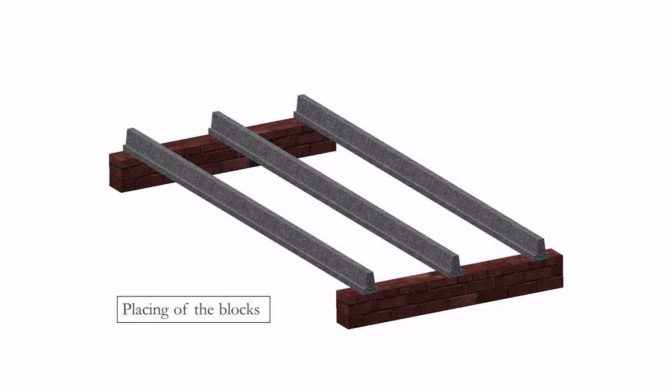The current solution for this problem is a beam and block floor. Steel reinforced concrete beams are put in place between the walls, after which smaller concrete blocks are positioned in between. On top of this created formwork, another concrete layer of about 5 cm is cast.

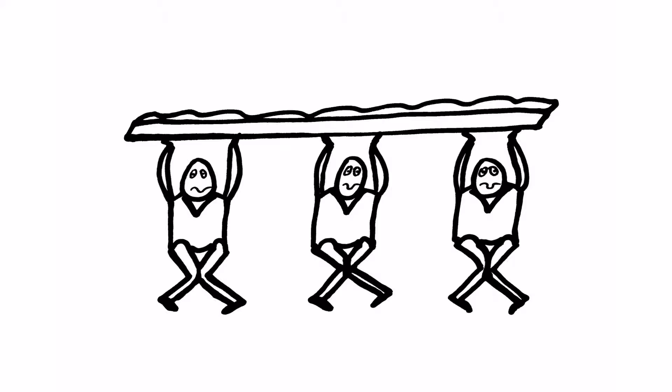This system is suited for renovation, because it consists of smaller elements, but still, these elements are heavy. Concrete beams with a typical span of 5 meters have a mass of approximately 100 kilograms. Such heavy elements have a low maneuverability and slow down the installation process.

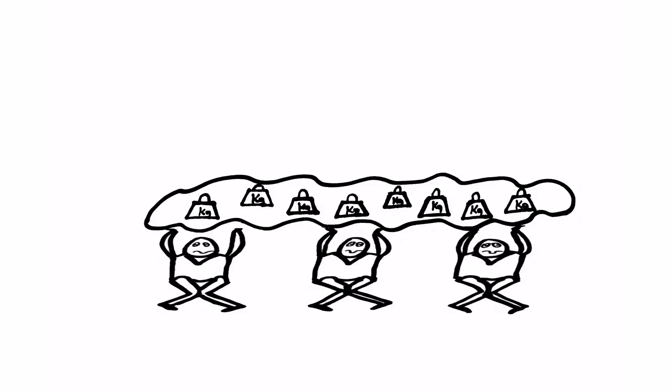At the Vrije Universiteit Brussel, we embraced this problem and turned it into a research question: is it possible to design a floor which is lightweight in installation, but still contains the required structural properties? Therefore, we elaborated the idea of combining concrete, carbon polymer composites, and cement composites.

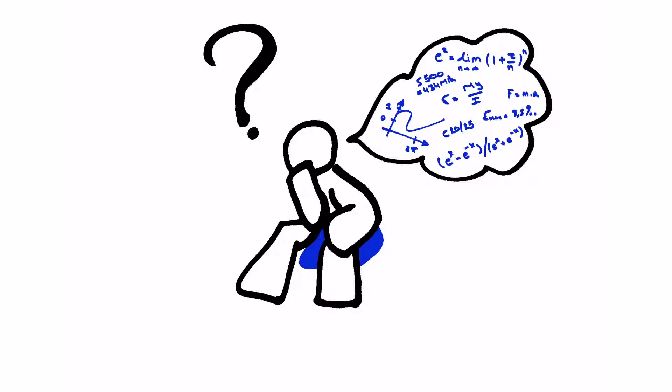To solve this question, I first made a theoretical approach to predict the floor's structural properties. All equations and formulas are integrated into MATLAB. Standard formulas are developed for traditional steel concrete cross-sections.

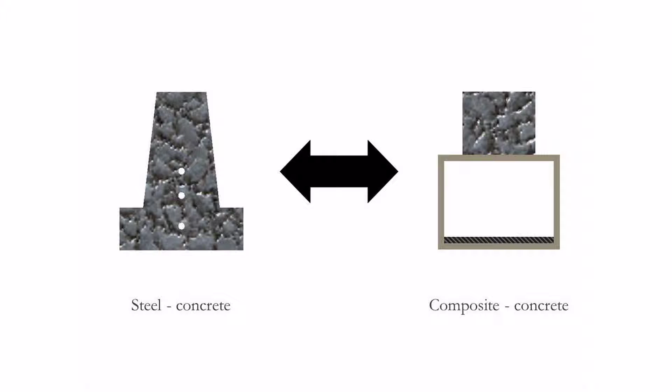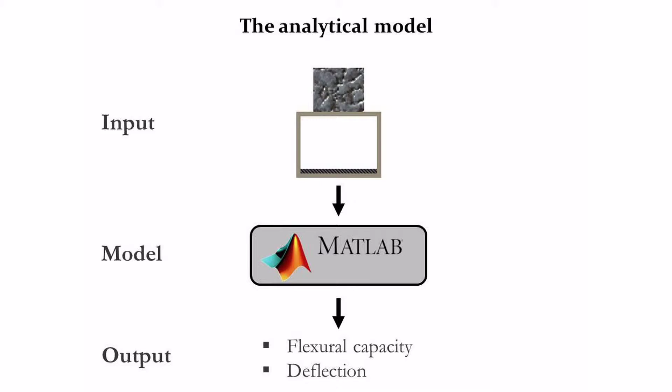Composite concrete cross-sections, however, have irregular shapes and different material properties. Therefore, an analytical calculation program is built so that all structural properties of any arbitrary cross-section with any material can be calculated. Different techniques and philosophies are merged into one analytical model.

First of all, the non-linear material behavior of concrete and cement composites is modeled as accurate as possible. Second, due to the unusual and irregular shape of this new cross-section, a discretized fiber model is built, resulting in small discretized elements that are treated separately in the calculation.

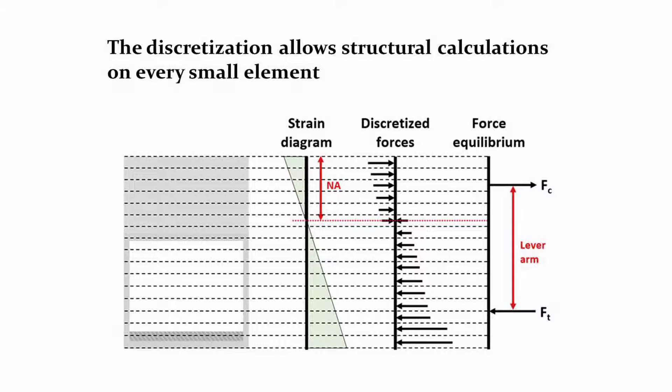Third, on this discretized cross-section, structural mechanical formulas are applied. These formulas result in small forces per discretized element, in turn resulting in the global bending capacity of the cross-section. Fourth, to speed up this heavy calculation, a smart search algorithm that refines its strain step is integrated in the model to obtain an accurate strain profile within a limited amount of time.

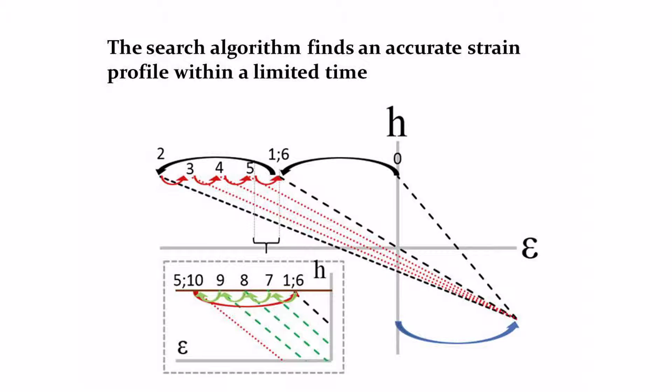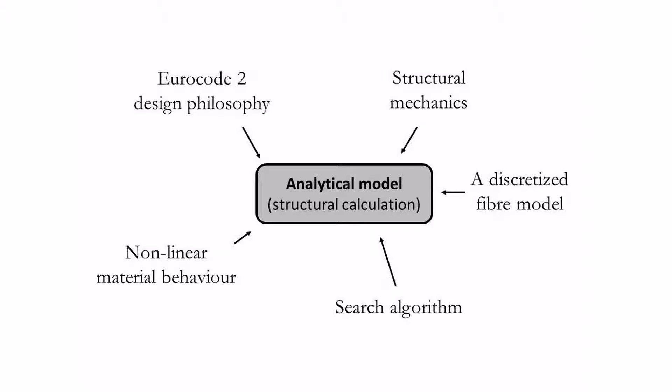Finally, together with the design philosophy and guidelines from Eurocode 2, the analytical model was built to predict the structural behavior. Besides this theoretical study, we also investigated its behavior in practice.

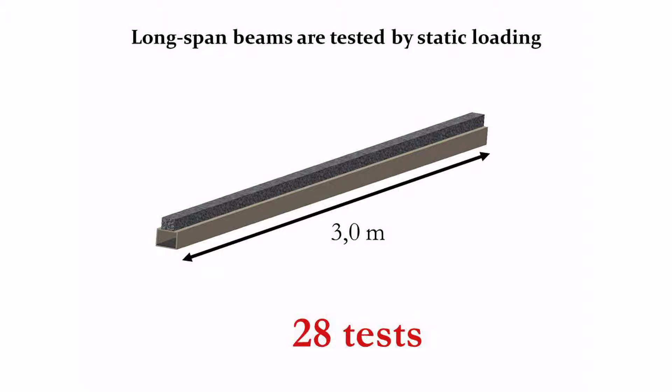Therefore, an extended test program with 28 flexural beams was carried out. Local strains were measured by strain gauges at the most crucial positions, such as the middle of the span.

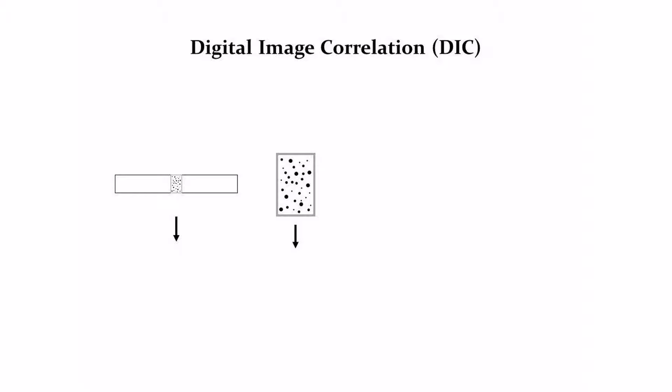To have an idea about the strains all over the surface, digital image correlation is used as a full field technique. By the means of small black dots on a white background, the displacement is measured all over the surface by two cameras.

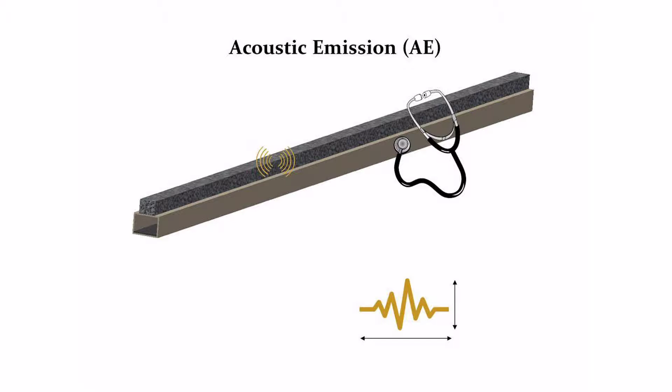To identify problems at the inside, not visible from the outside, acoustic emission is used. Acoustic sensors listen to the waves that are emitted by the cracking of the elements.

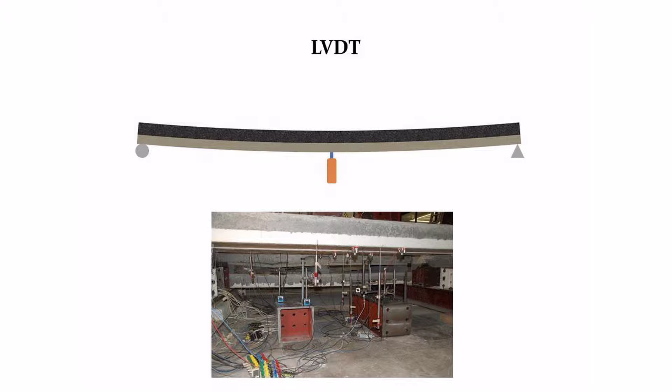Finally, the deflection is measured at different positions underneath the structure. This is done through several LVDTs. Equipped with all these techniques, these 3-meter span beams are loaded until failure.

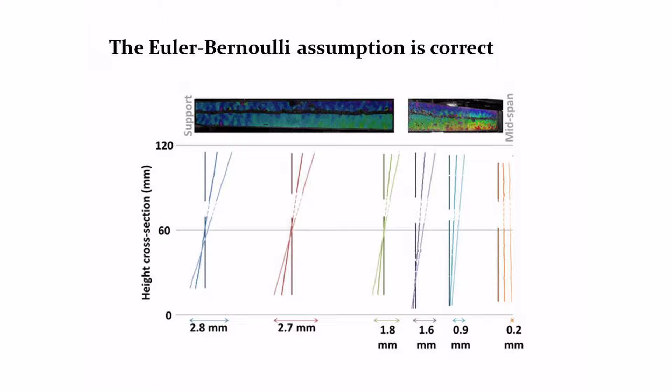What are the results of this extended test program? First of all, we check the validity of the Euler-Bernoulli assumption through the DIC analysis of the beam side. All cross-sections remain plane, and thus our assumption is correct.

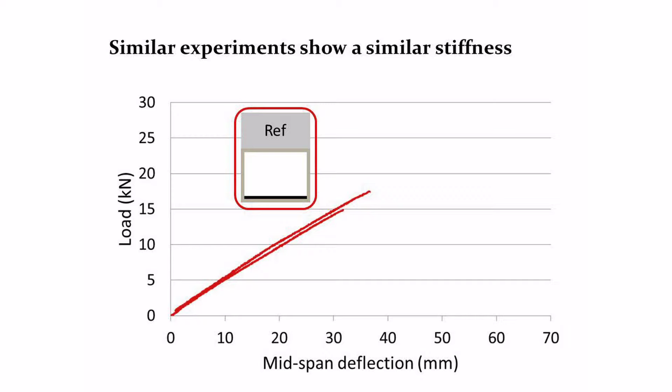Identical beams exhibit almost the same stiffness behavior, which is a nice result considering the manual production of these beams. Adding the theoretical prediction to this graph, we notice that also the stiffness is well predicted, but there's a large overshoot in the failure load.

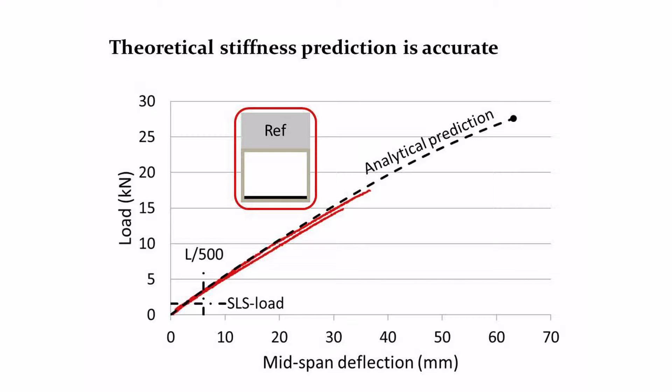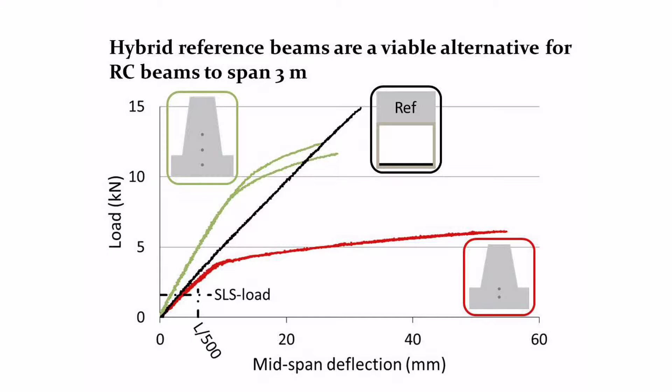Considering strength and stiffness, this hybrid reference beam with comparable dimensions but lower mass shows to be a viable alternative for reinforced concrete beams with a span of 3 meters.

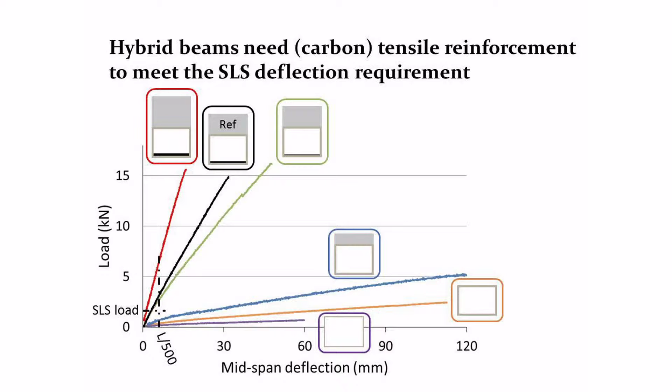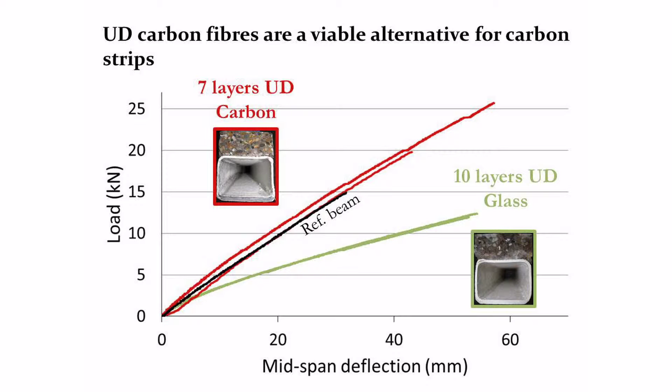The presence of carbon strips strongly influences the stiffness, and therefore carbon strips are needed in the design to fulfill all deflection requirements. To increase its fire resistance and decrease its environmental impact, experiments have shown that the carbon strips cannot be replaced by unidirectional glass fibers, but by unidirectional carbon fibers.

Also, the theoretical prediction is in agreement with the experimental stiffness, but exceeds again the experimental failure load. This made us thinking again.

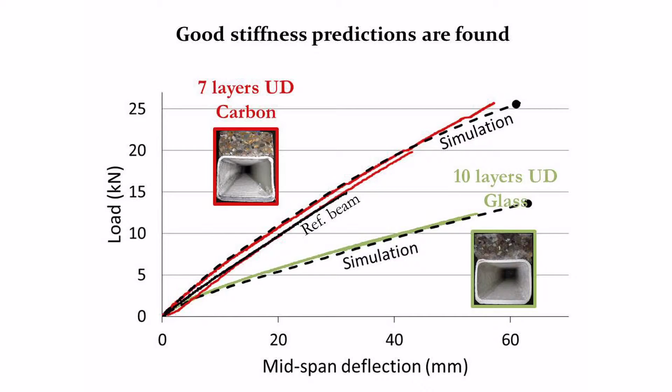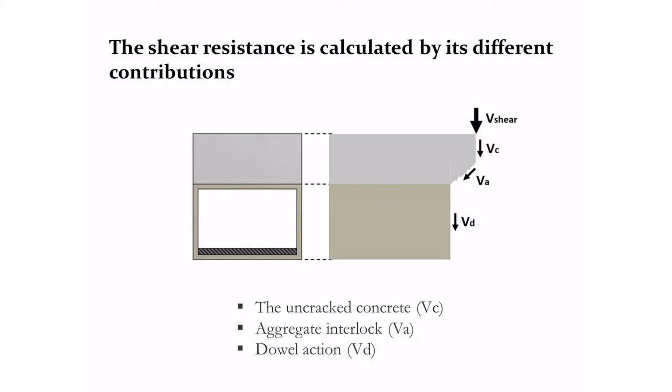This large overshoot was due to the occurrence of shear failure phenomena, so I decided to investigate this shear behavior more into detail. Again, first a theoretical study was performed by returning to the fundamental formulas of the different phenomena that contribute to the shear resistance: the uncracked concrete, aggregate interlock, and dowel action.

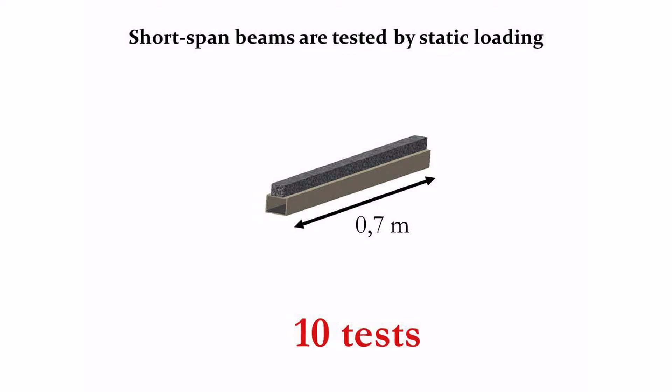Similar to the previous large span experiments, 10 short span beam tests are performed to verify this theory. Good correspondence is found on the level of the concrete. However, further research will need to focus on the contribution of the composite box.

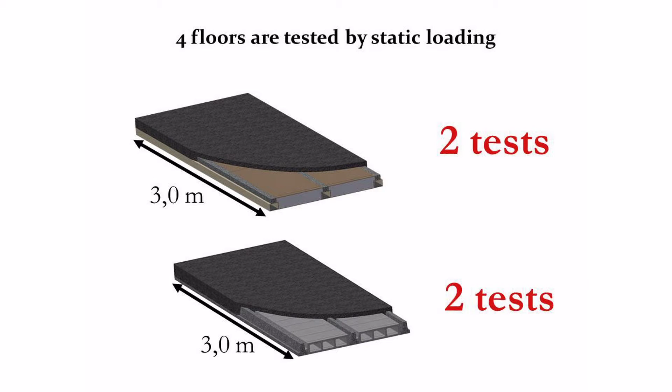So we obtained very nice results on the tested beams. But what if we extend our study to floors? Statical tests are performed on 4 floors, ending up with the same results: the hybrid floors have a sufficient load-bearing capacity and the stiffness is well predicted.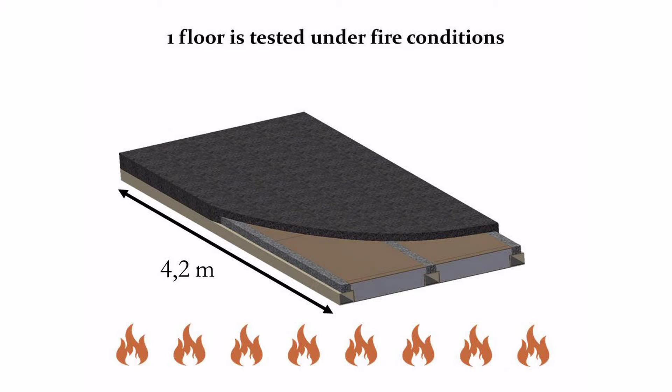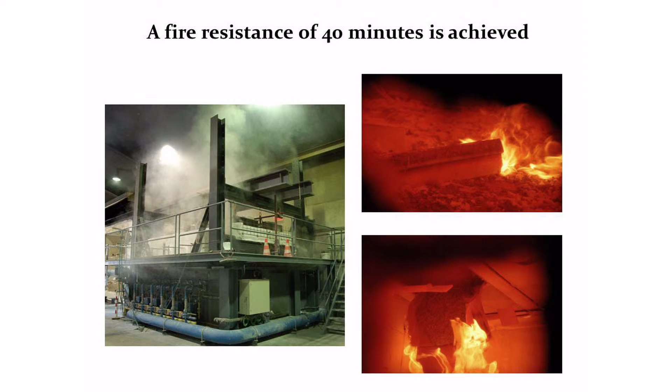To show its fire resistance, one floor with a span of 4.2 meters is subjected to a fire. The good fire resistance of the different composites was proven by the fact that the floor only collapsed after 40 minutes. At this stage, we have a lightweight concept that can save up to 89% on all installation elements of the beam and block floor.

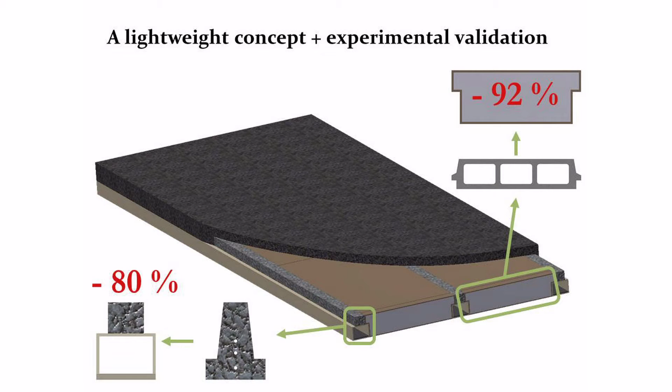Moreover, we have a theoretical calculation tool and an extended experimental validation. However, cost may still be an issue to enter the market.

To close the gap between this research and the market, a multi-objective optimization tool is built which allows the user to choose between solutions which are lightweight but more expensive, or rather solutions which are cheaper but more heavy to install.

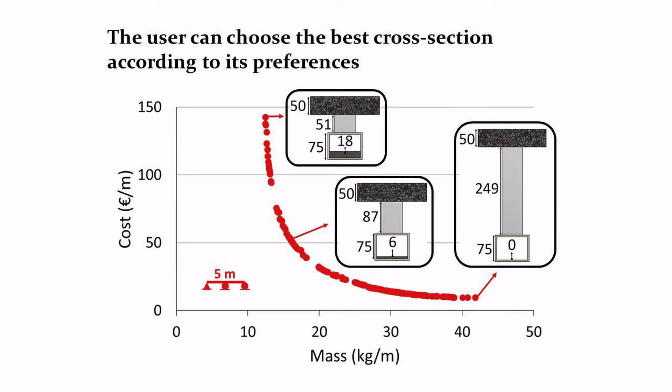An analytical model is built to predict the bending behavior, and a first attempt is made in calculating the shear resistance. To validate all these calculations, 38 beam and 5 floor tests are carried out.

Finally, a multi-objective optimization is elaborated to show the trade-off between mass and cost that can be made by the user. In this way, this thesis provides an answer to a practical today problem by the combination of theoretical research and an extended experimental validation.